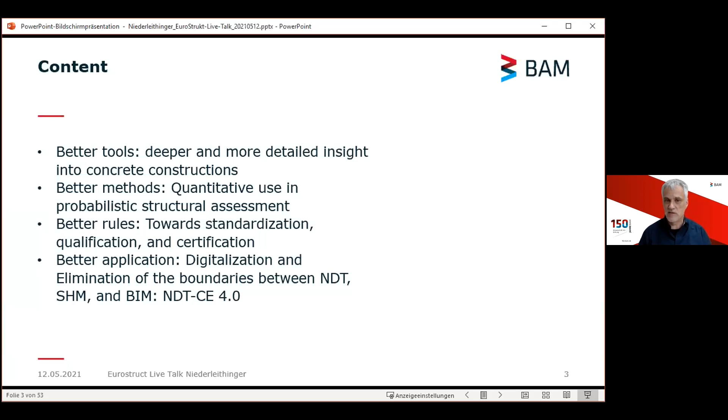I would start with my institution. Probably some of you have come across BAM, the German Federal Institute for Materials Research and Testing. We are part of the German government, part of the Ministry for Economy and Energy. Our predecessors were founded in 1871, so this year we are celebrating our 150th birthday, indicated here on the bottom of my background. We are about 1,800 employees with a mission on safety in technology and chemistry.

There's a large variety of topics, too many to talk about here right now. But more important for today, there are departments of non-destructive testing and civil engineering, and my division is somehow in between both.

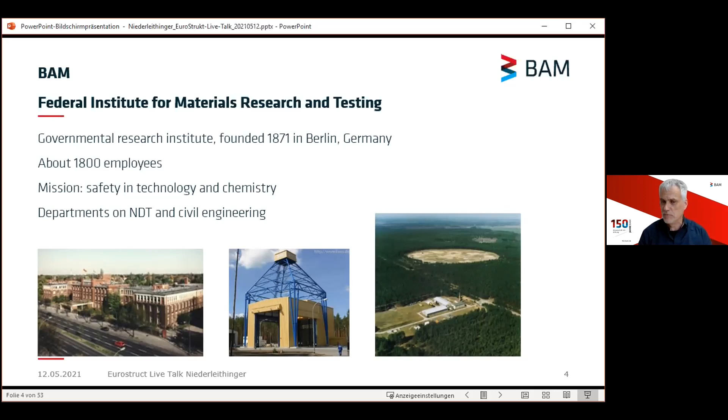What we are actually doing in this division - of course our major work is in research. We are developing or optimizing non-destructive testing methods for concrete and other building materials. We are working on validation of new methods, on providing references, reference data, reference specimens, and other kinds of things. We are also working on standardization in various committees, national and international.

We are doing actual testing on site if it's a more complex task, or if special equipment is required, and providing data analysis. We are also providing workshops and trainings in various ways.

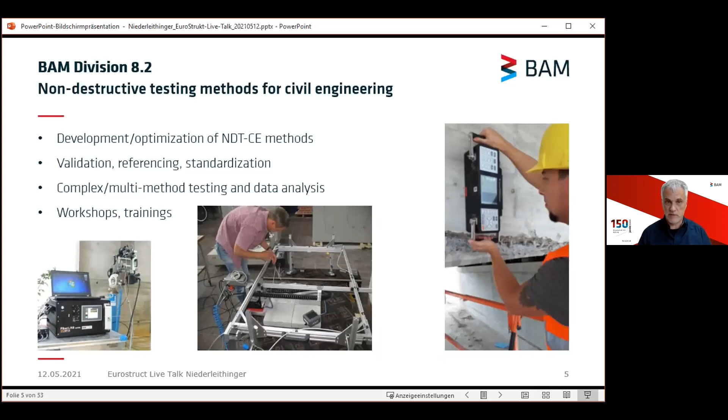Our main methods are ultrasound and radar. I will today mainly focus on ultrasound. There will be some hints to the other methods as well, but ultrasound will be the focus.

We are also working on sensors which can be embedded in concrete - I will show you some examples later. And we are working on something called laser-induced breakdown spectroscopy, a method which can be used to detect elements on the concrete surface with very high resolution and very high speed. Unfortunately, today the time is too short to talk about that one.

We are of course also using some standard methods you probably have heard of or are familiar with, like cover meters, impact echo methods, or the rebound hammer, but we are not doing research on that.

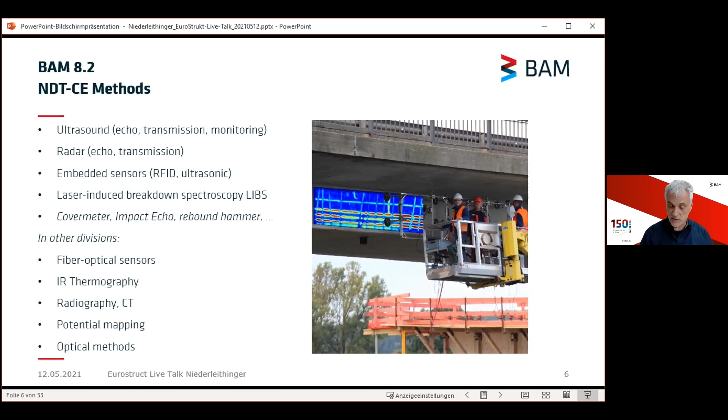That's not all what's done at BAM. There are a couple of other divisions who are also contributing to non-destructive testing or monitoring in civil engineering. For example, there are divisions developing fiber optical sensors, working with infrared thermography, radiography, computed tomography, potential mapping, and optical methods. And of course, if it's needed, we are joining forces.

Our application areas are in general any kind of quality assurance in civil engineering, condition assessment, and structural health monitoring. Our main application area is road infrastructure, but to a certain extent also railway or waterways. We are covering everything between buildings, basements, foundations, roads - name it, we are doing it.

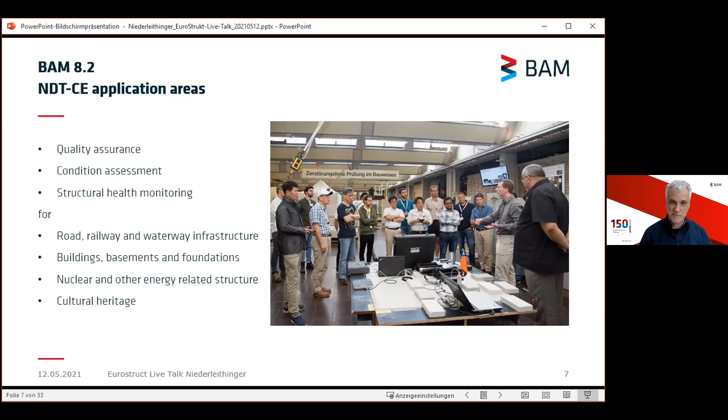We are also working more and more extensively on nuclear structures, mainly nuclear waste storage. Nuclear power plants is not a big topic for Germany anymore. And from time to time, we are also working on cultural heritage.

So what is it all about? Why are we doing NDT in civil engineering? Of course, that's to keep the iconic and also the non-iconic buildings of the civil infrastructure as long as we can. There are a couple of excellent examples of buildings standing upright for 1,800 years, like the Pantheon in Rome. So the ultimate goal would be to keep modern buildings as long as that. Probably we will not be so successful, but 100 years is still a very challenging goal.

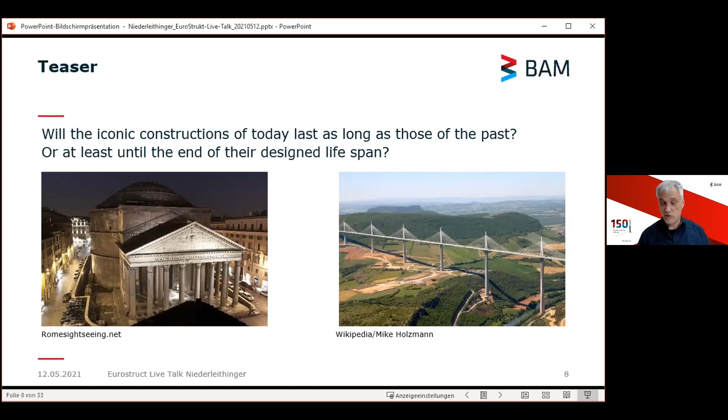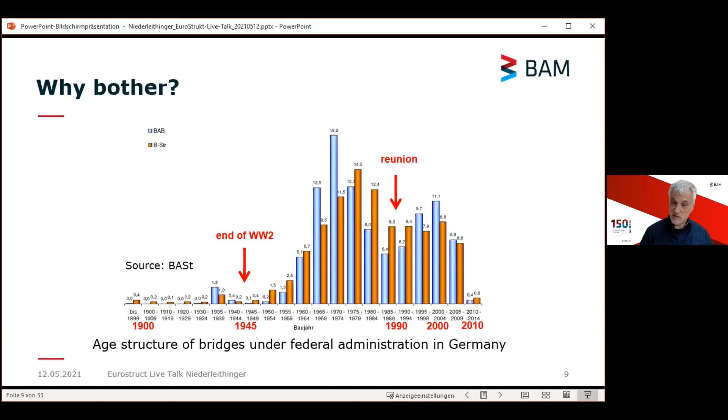So what's special about the infrastructure in Germany? Probably you have seen similar graphs before. There's almost no infrastructure left, mainly concrete bridges, before 1945 for obvious reasons - that was the end of World War II. There was a large amount of rebuilding in the 1960s, 70s and until the 80s, then a small decline, and another smaller peak after German reunification. Some of these buildings, now 30, 25, 20 years old, already show signs of deterioration. But our main target is still the bridges from the 1960s and 1970s, some of which are close to the end of their service life for several reasons.

Fortunately, the state of the art in non-destructive testing has developed a lot. Probably some of you have worked with conventional, simpler methods such as the rebound hammer or ultrasonic pulse velocity - that's been around for 50 or more years, standardized and commonly used. But after the 1990s, there was a very fast and extensive development of other methods, such as ultrasonic echo, radar, and others, which gave deeper insight into concrete structures. In the 1990s it was mainly bulky, complicated devices, slow and hard to deploy, used only by specialized experts. But beginning from around 2005 to 2010, more and more methods came around which are easier to use, commercially available, and give on-site information about what's inside a concrete structure.

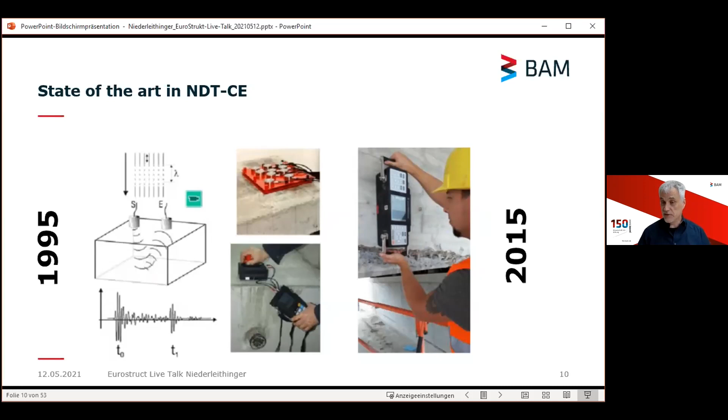One example would be ultrasonic echo testing by point contact transducer arrays, which give a direct image of the interior on a small screen. This is not the end of the story - development goes on and on.

Two examples of very innovative and modern tools would be GPR equipment, such as the one produced by the Swiss company Proceq - very small, very easy to use, directly attached to cloud data storage, giving information on site, even using augmented reality to show the user where it's safe to drill or where to check reinforcement. The ultrasonic development also goes on. On the right side is an example from the Russian-German company ACS, who now provide, starting this year, a true 3D ultrasonic device called Mira 3D, which gives, with one single measurement, a 3D picture of the structures inside the concrete. That's most probably not the end of the story - it's just one point in time, and development will go on.

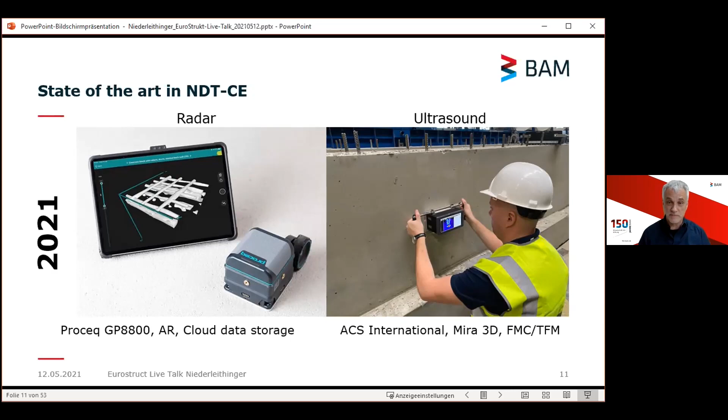The main thing for practical application is that these methods are meanwhile more or less successfully implemented in practice. Ultrasonic transmission, for example, is used to check the quality of concrete, either in the lab or on site. Ultrasonic echo is used to detect tendon ducts, as in the example on the right. Then, directly on site, we can give information to the responsible engineers about what was going on.

Still, there are a couple of things we have to work on. For example, the depth of penetration for most methods is limited - one meter is a good guess for this limit. If we have very complex structures, the imaging methods might not be sufficient at the moment, and mapping complex or diffuse deterioration is a big challenge. Also, detecting slow and small damages is a challenge.

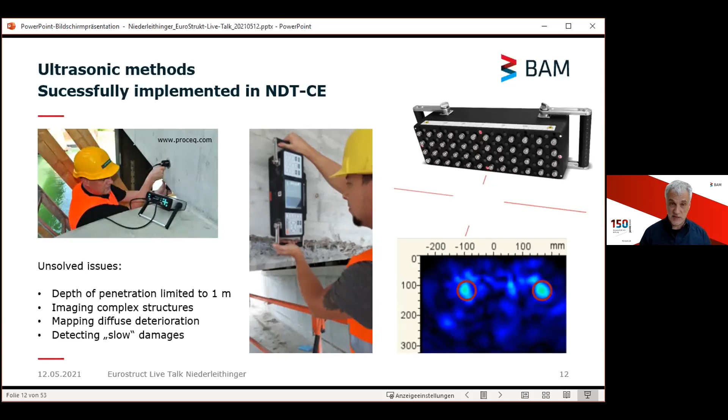I will provide some ideas for solutions to these techniques. But before that, I will show you an example of how results acquired with commercially available instrumentation today can be used in a better way than just to provide colorful images to detect rebar and avoid hitting the rebar when drilling, or to avoid hitting a tendon duct when drilling, and these kinds of things.

One challenge in Germany currently is that we have to reassess about 2,000 bridges under federal administration, because they are in intermediate to bad condition or have structural deficiencies or other issues. What's normally still done today with these kinds of NDT is to show pictures like this - maps of the interior of the concrete with signatures of, for example, tendon ducts or the thickness of the structure.

What we propose to do is to evaluate this data in a more thorough way, to check all the influences which give indications of the potential errors and standard deviations and other issues, to provide a really statistically proven quantitative measure, for example for the depth of a tendon duct, which can then be used in quantitative probabilistic assessment of a structure.

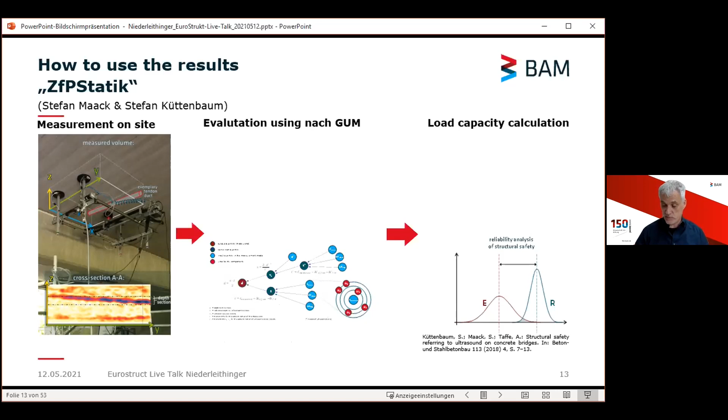One example is a pre-stressed concrete bridge in Bavaria, near Munich, where a very detailed assessment was done because it was known that the load capacity, according to the older standards, was not sufficient to cope with the traffic anymore. It's a box girder bridge over a medium-sized river, with 3 spans between 40 and 55 meters.

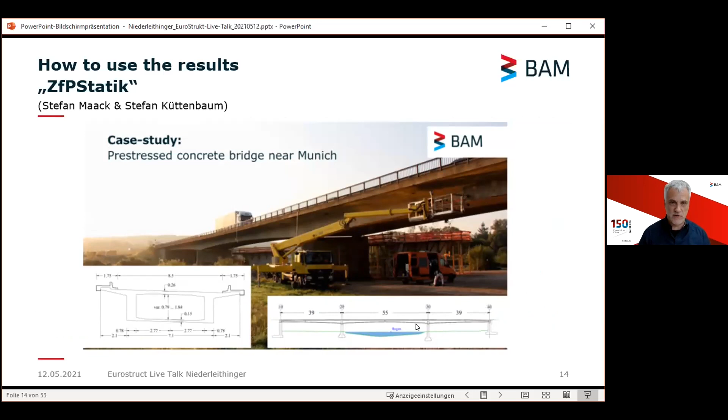What was done first is to check what kind of parameters are really important for the probabilistic assessment, and where we can gain the most information and value out of any kind of measured values.

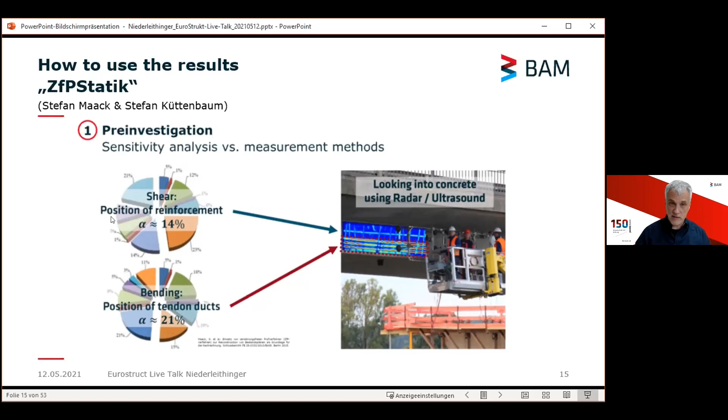After a very detailed analysis of the bridge, it turned out that the position of the shear reinforcement was very important, and also the position of the tendon ducts. If we could provide very precise values on these positions, we could potentially improve the trust in the load capacity assessment and even get higher reliability values. So what was done there is to use radar and ultrasound to locate shear reinforcement and tendon ducts, and to do a quantitative analysis on that.

So that's an example, that's the cross section. We were looking for the outer tendon ducts. We were able to see the first row and also the second row, not the inner ones, but the outer ones were the most important. We used ultrasound and then radar to detect the precise position and depth.

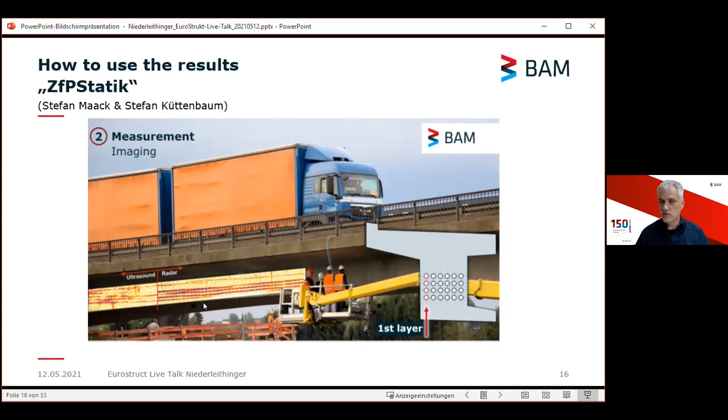We didn't just provide the colorful pictures, we also picked the positions of these tendon ducts, calculated all potential influences, potential errors, standard deviations, and so on, and put this information into structural models with all the uncertainty information.

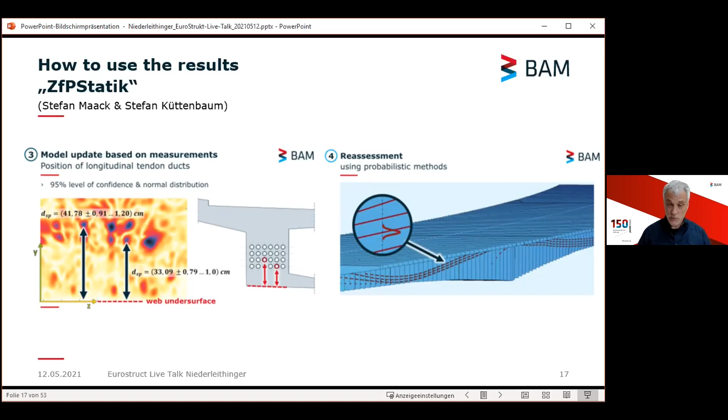The good thing is that after this detailed evaluation, we helped to raise the reliability index from a certain value here, 3.8, to values around 4.8. So by more than 20%, about 25% higher reliability of the structural reassessment.

That's just the beginning of the story, there's still work to be done. There are 2 recent publications, unfortunately only in German so far, but that's one path we will continue on, to provide a way to use non-destructive testing methods really in a quantitative way.

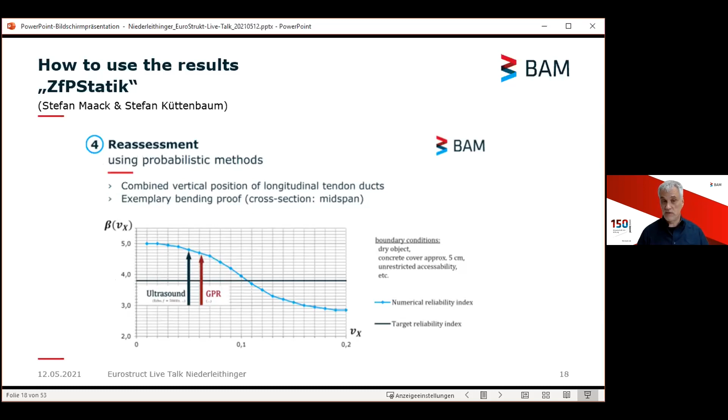But there are other issues with NDT in civil engineering. I mentioned that we have a depth limit of about 1 meter, but there are lots of constructions which are thicker than 1 meter: certain bridges, dams, also certain buildings in nuclear facilities, and probably you have other examples.

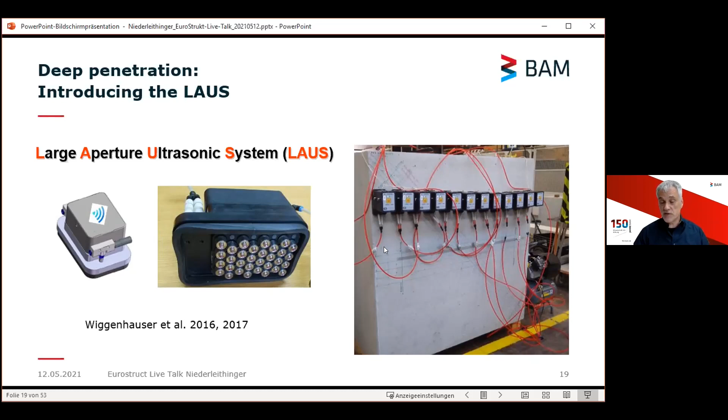What we have done is to build a really large ultrasonic instrument, called the LAUS, Large Aperture Ultrasonic System. With many probes, which can be freely positioned on a surface, using vacuum to stick onto the concrete surface - all these red things you are seeing here are vacuum hoses. This instrument is able to look much deeper than commercial ones.

One application example is a bridge close to my hometown Berlin, about 2 meters thick. During the concreting, there was a heavy rainstorm. At some point in time, the formwork was half full of concrete and half full of water, so of course this had an effect on the concrete quality. Some of the damages were visible from the outside, but the authorities wanted to be sure that there were no serious damages on the inside.

From the bottom of the bridge, it was easy to check the damages, but as this bridge was about 2 meters thick, the commercial instrumentation failed to map the entire structure. So we used this LAUS system from the top to check the position of the tendon ducts and to see whether we see any indications of disturbances above them.

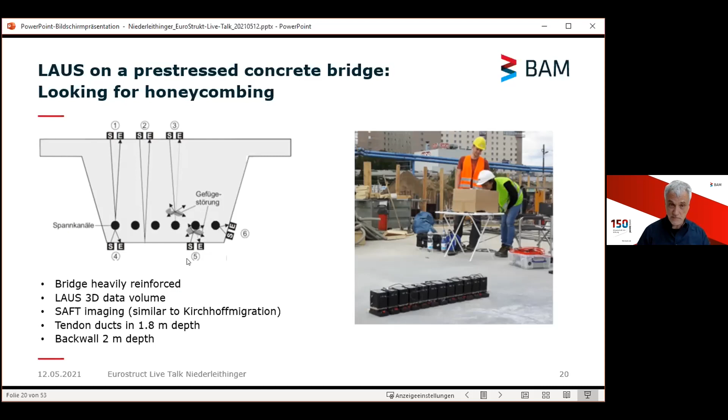That's one example of a vertical cut through our 3D data volumes. You see here there are reflections, clear indications of the top of the tendon ducts, a little bit weaker on the outside because there we have less coverage by ultrasonic energy. We also see the backside, the lower side of the bridge, with some gaps because the tendon ducts produce a shadow. But this looked quite good, and so we could deduce that most probably there's no big issues above these tendon ducts, because otherwise we wouldn't have seen these clear echoes.

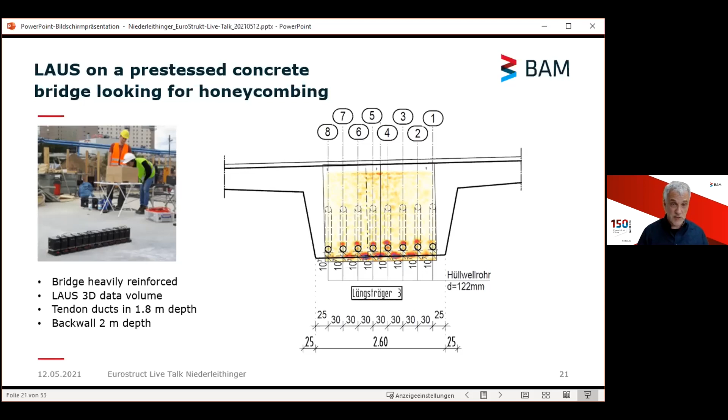Unfortunately, in some places the data looked different. If we look now at horizontal slices at the level of the tendon ducts, at some places the tendon ducts were quite clear to see, very clear echoes, very sharp at the position which was expected. But there were other places where these echoes were very blurred or even missing.

So we did the most simple thing to do: we asked the contractor to drill and check whether there were some issues. And actually there were issues - there were honeycombing and other forms of bad concrete. But fortunately, this could be repaired by injection, so they didn't have to replace the bridge.

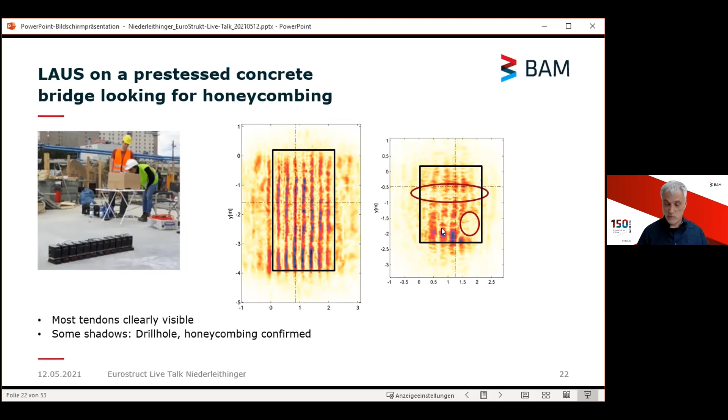As you've seen, the images were not perfect. We just see reflections with gaps and indications of the top of the tendon ducts. We won't be able to see the precise structures or even the diameter of the tendon ducts. That's one thing we're still working on, using input from geophysics.

For example, using an imaging method called reverse time migration. I won't go into the details here. We had PhD students working on that, or still working on it.

For simple examples on materials like polyamide, which is easier than concrete because it's homogeneous, with holes inside, we could provide images which can be used to measure the diameter of these holes quantitatively. So if you have an unknown type of tendon duct in your bridge, this method could potentially be used to check for the type of tendon duct, its shape and diameter.

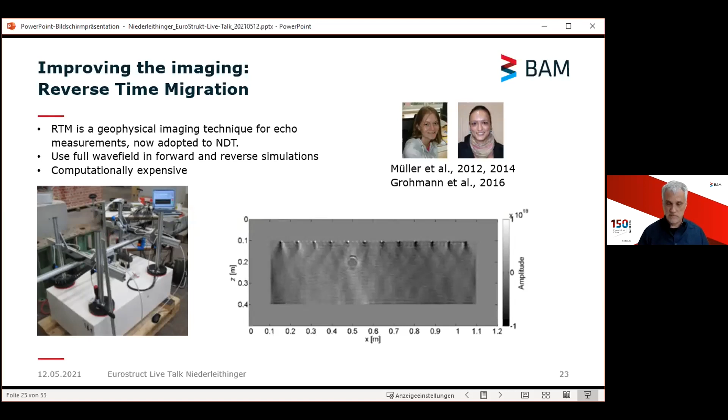Unfortunately, it's still a method under research. It's also computationally very expensive, but for some tasks it might be used.

One example where we combined both deep penetration and better imaging is a nuclear facility in northern Germany. It's a nuclear waste storage site which has to be closed down. It's a former salt mine, and to close the former mining tunnels, a special type of concrete is used, in the form of big plugs, 4 meters by 4 meters by 25 meters long.

Of course, no ultrasonic instrument is able to map 25 meters of concrete. We did some trials with our LAUS system and were able to locate at least some reflections from up to 7 meters, where there was no built-in structure.

So we thought it might be a crack, and it was later proven by drill holes that there were cracks. Of course, that's a bad thing for an engineered barrier in a nuclear repository. Fortunately, this is just a trial site, so no harm done.

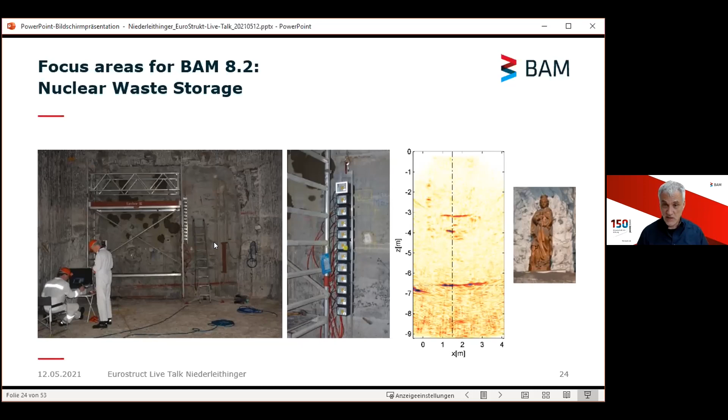Our data can now be used to improve the concrete mixture and the way of building it to provide better sealing. As we were not fully satisfied with the image quality—this is a cross-section, I'll skip this—we tried to use better imaging methods.

So this is the reverse time migration I've shown before. First, we did some simulations to check whether we could image the shape of any kind of crack correctly and also detect features at deeper depths.

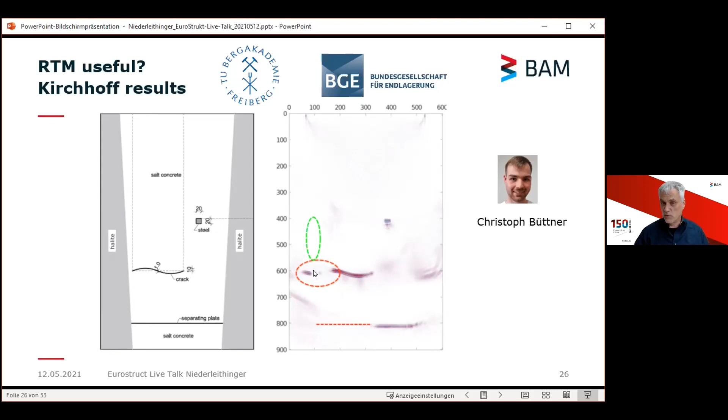We saw that conventional imaging shows some things, but they are not complete. We also don't see the side boundaries and other kinds of things. Using these new methods, we get a better image of this sinusoidal crack type, more information of this plate, and we're starting to see the lateral boundaries.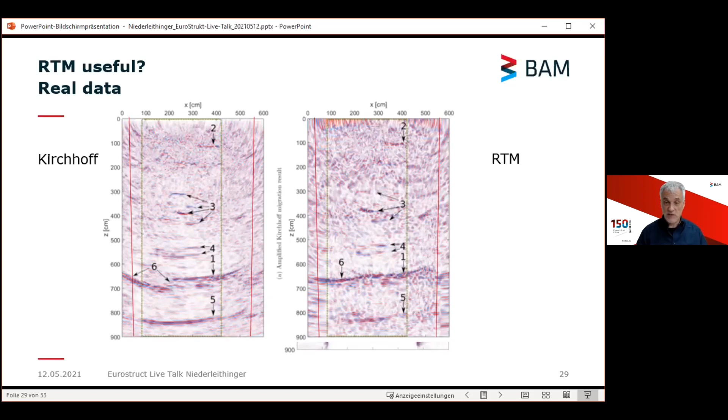We were also able to get a better image of the plate down here below, without artifacts at places where there's actually no plate. That's work and research which has to be continued in the coming years.

One other development in non-destructive testing is that we're starting to loosen the boundaries between non-destructive testing and structural health monitoring. We're using similar sensors and similar methods, and putting the information together to get better models and better information for structural engineers.

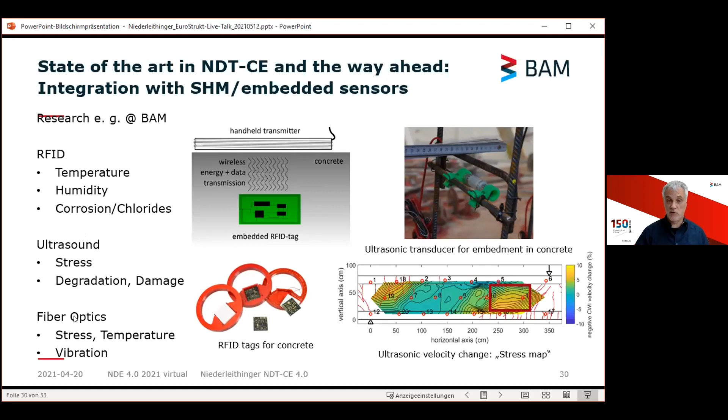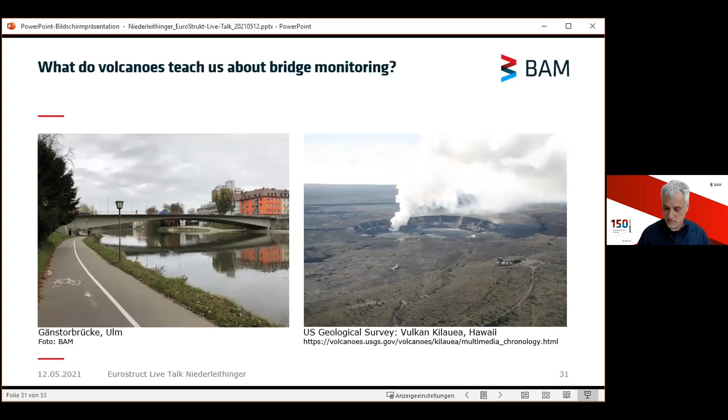So one example for this kind of work: you could imagine that a volcano and a bridge are totally different, but they have some things in common, because they both have slowly developing damage. At a certain point the damage development might speed up and there might be a sudden collapse or eruption. We need to measure these tiny precursors of deterioration before anything serious happens.

For volcanoes, this is done by seismologists measuring the speed of seismic waves. They're able to detect very small changes in velocity, less than 1% change. A couple of weeks before the actual eruption, we see a drop in velocity, and this drop occurs much earlier than any other kind of indication.

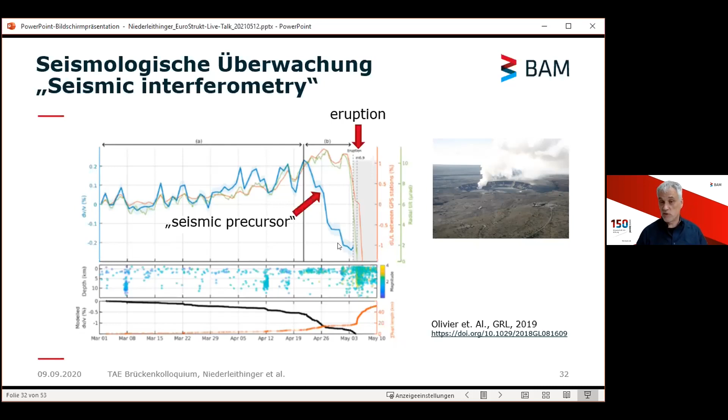These other curves are for conventional measuring tools like inclination of the surface or changing distance between two landmarks and so on. So measuring the speed of seismic or ultrasonic waves might be a useful thing also for civil engineering.

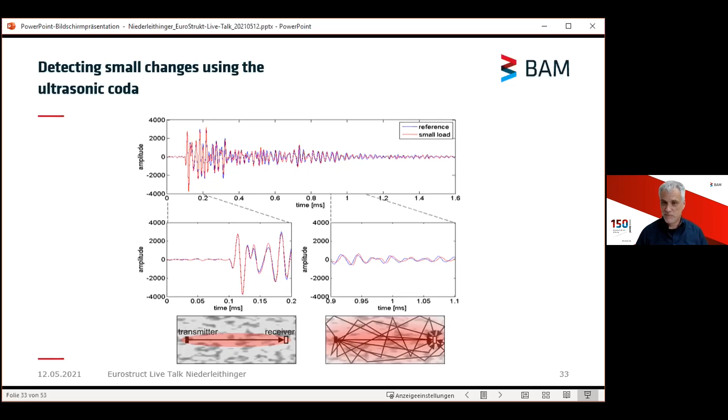There's another good point for looking at this late part of the signals: we can cover a very large area, so we don't need that many sensors to cover a certain part of a construction. Of course resolution is limited, but still we might be able to capture the part of the bridge where change or damage is happening.

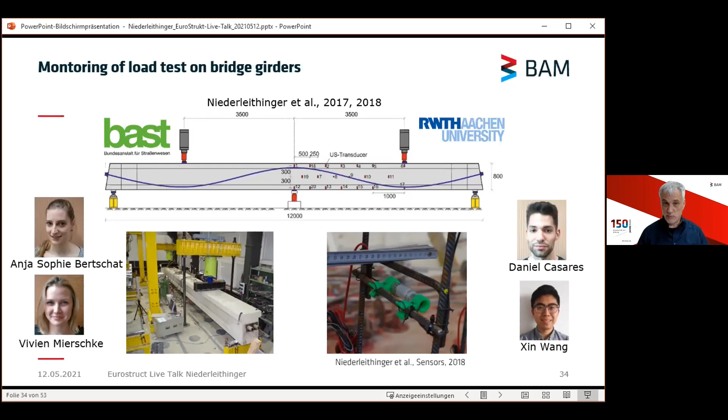Some experiments were done at RWTH together with the German Road Research Institute, with a network of these ultrasonic sensors in a two-span bridge girder in a full-scale load experiment. We were allowed to put sensors in a part of this girder, and at a certain load point we were able to provide a map of velocity change.

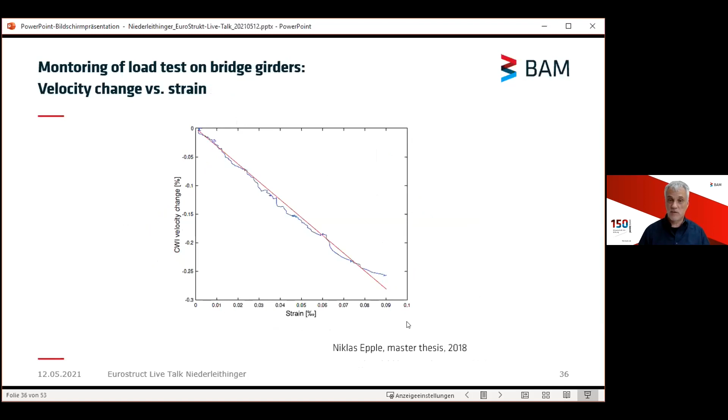We can even, by calibrating with some local strain gauges and comparing velocity change to strain, calibrate these images and provide maps for strain change. That might also be a very useful tool in the future.

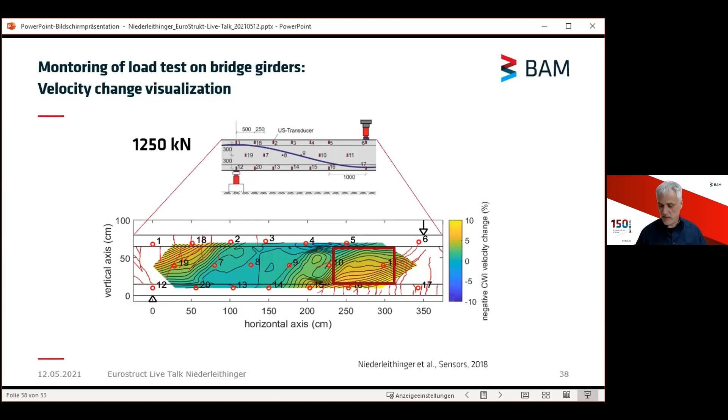We also see some anomalies in our ultrasonic strain maps where we didn't expect any cracks, but actually there were some, because concrete is not completely homogeneous. We have some inhomogeneities here which are also reflected in these maps.

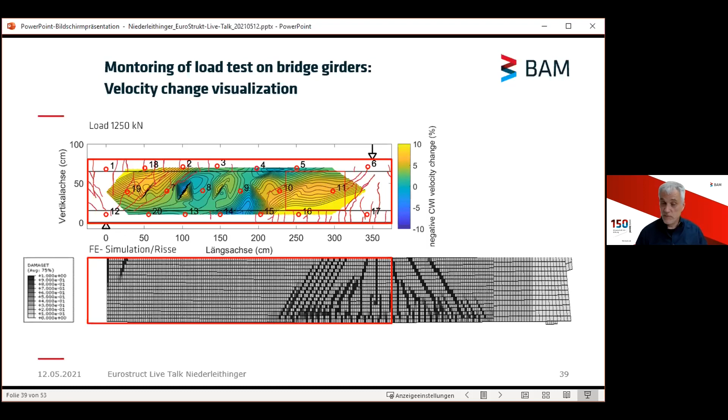Because we're able to map these inhomogeneities, we might even add more information to simulations which predict the crack pattern. The pattern is similar, but not the same, so we might be even a bit closer to reality than the simulation.

This is now being tested in practice at the bridge over the River Danube in Ulm in southern Germany, where this bridge from the 1950s is equipped with several monitoring systems so we have something to compare with - for example acoustic emissions, strain gauges, and other devices. We have put our sensors in there.

We are measuring the velocity changes over time - these are data from one week, and of course we mainly see the temperature change - but this is now continued, and probably end of the year we will have a good example of how this method can be used in practice. We will do some load tests there to prove that our method really is able to detect any kind of additional damage.

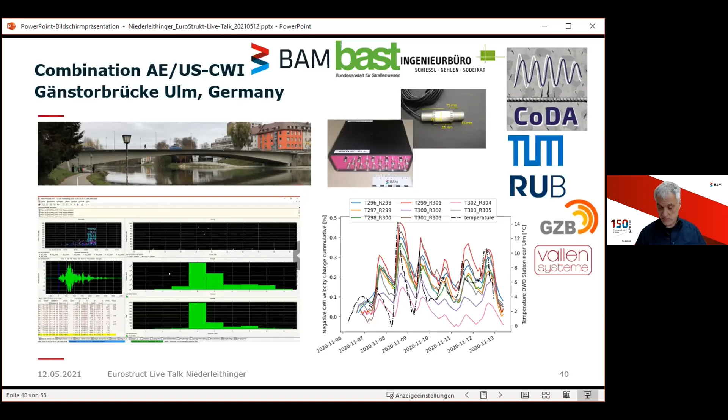Finally, we have to put all this data somewhere. So far, the NDT world has always been a little separate from other parts of civil engineering. There were specialists giving reports on paper or as a PDF to engineers, but there was not really quantitative data exchange. The main way of exchanging data in the future in civil engineering is, of course, building information modeling. There are limitations to that, but most probably this will play a central role in any civil engineering project. NDT and structural health monitoring can provide information to several phases in the BIM information modeling cycle.

It can help document as-built buildings. We can do quality assurance during fabrication and construction. We can assist in operation and maintenance, for example to check a couple of parameters, as well as in destruction and renovation.

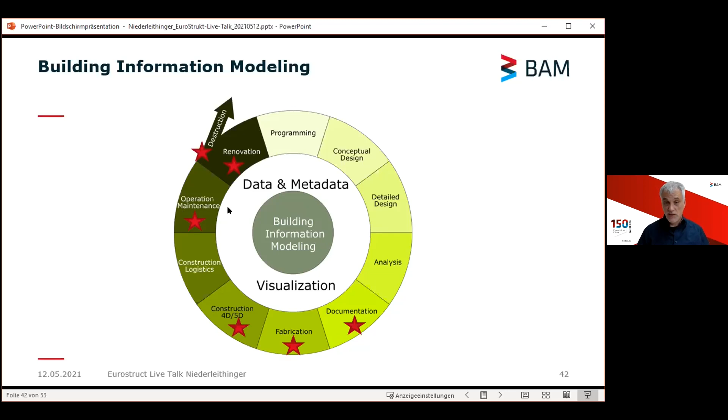Unfortunately, there is so far no interface between BIM software and NDT and sensor data. There are a couple of national and international projects starting to work on this, to use BIM and NDT and sensor data to get better models or even provide digital twins. But that's not standardized yet, and that's one thing we have to do.

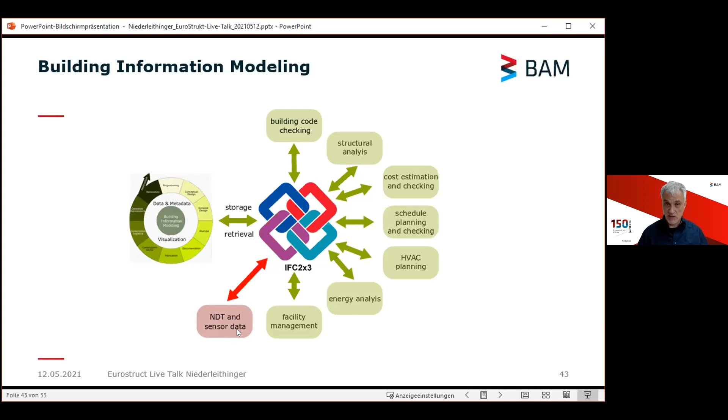The probable focal point here will be something called Industry Foundation Classes, which provide formats to exchange information between BIM and many other things, such as structural analysis, energy analysis, facility management, and potentially also in the future NDT and sensor data. But there is still a lot of work to be done. That's a challenge for the future.

We probably can learn a lot from Industry 4.0 and the Industrial Internet of Things. In today's smart production, these kinds of things are already used. Monitoring and NDE sensors and devices all have internet-capable interfaces, and they can directly talk to each other. They can provide data for scheduling maintenance, but they can also be directly connected, for example, to the economic part of the software in production.

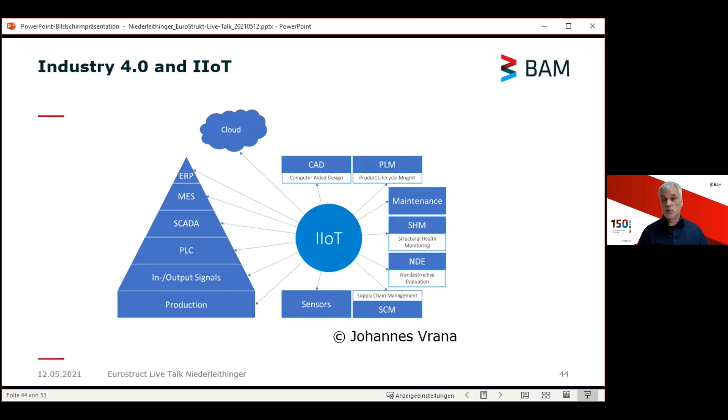In civil engineering, we will probably still have some different systems, because I don't expect that raw data from structural health monitoring or NDT will directly go into any BIM software. Probably just the information about the results, or the places where measurements have been done, will be given to the BIM software and also visualized there. But the raw data, including all the metadata, will probably be in a separate place, because it's simply too much data for the BIM software. But we have to provide the interfaces here, and that's things which are still under development.

Even providing this system, which defines formats between the sensors and devices and the databases and the persons doing the interpretation, has to be developed yet.

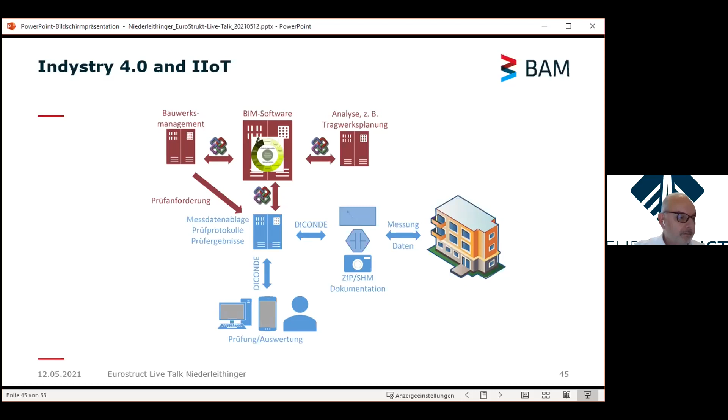One project which has just started is working in that direction. It's called CASPAR. It's joint work of BAM and the University of the German Army in Munich, and several industry partners, to provide something like a database system which is able to collect all kinds of data, put them in a really trusted data storage using blockchain technology, and provide interfaces to BIM, to CAD software, but also to any kind of analytical software.

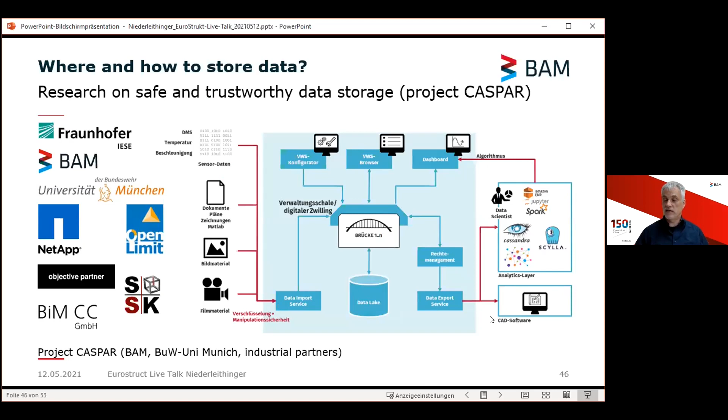Finally, I was talking about needing standards for this kind of data exchange, but that's not the only part of NDT and civil engineering where we need more standards. In other fields of NDT, we already have dozens of standards on certain methods, sensors, evaluation technologies, and formats—they almost have everything done at the moment. But in non-destructive testing in civil engineering, for example in Germany, we just have the rebound hammer and ultrasonic pulse velocity standardized.

There are a couple of initiatives which are probably going to change this. I'll name one: the EC project IM-SAFE—Professor Heidi and Professor Strauss are both part of that—preparing a way towards European standardization and monitoring. That's a very important initiative, and it's very urgently needed. But also for the qualification of personnel and institutions, we need more work to be done. In traditional NDT, there's already a very sophisticated three-level qualification scheme.

Certification is regulated and everything works in an organized way. So if someone has done one of these trainings, he can really be trusted to do a good job on site. But in non-destructive testing and civil engineering, we have only very simple qualifications.

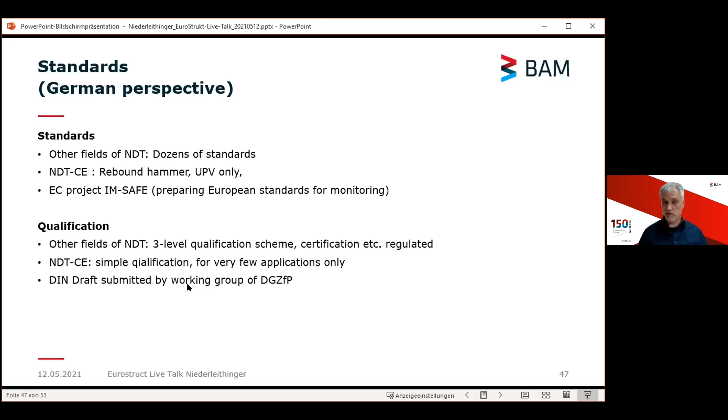So instead of giving a conclusion of my talk, I promised one more thing. This is something that was new to me a year ago, and I want to share what we have done so far in that direction.

Cosmic rays, one special type of cosmic ray - I'm talking about cosmic muons. These particles are not cosmic rays themselves but are generated by cosmic rays - fancy particles generated in the upper atmosphere, going downwards and penetrating deep into the Earth. That's natural radiation. There's almost no harm done by them, and especially no additional harm done by them.

There have been a lot of experiments using them, for example to locate voids in the pyramids. My colleague, Professor Christian Grosse from Technical University of Munich, is currently using GPR to check whether these results are actually true. But there are also starting to be commercial applications, for example checking containers for contraband, or checking radioactive waste containers for anything in there that shouldn't be.

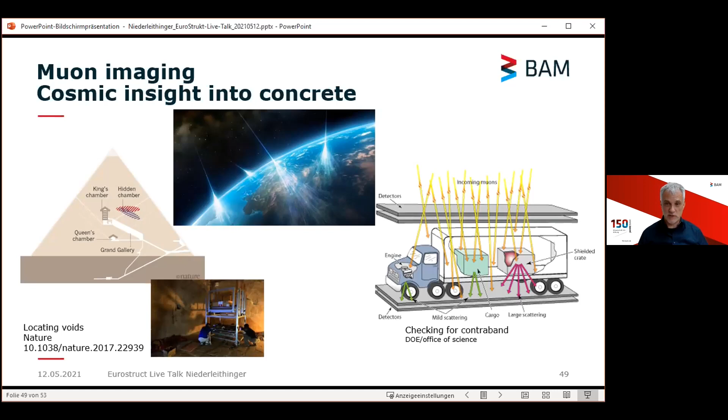There's a company in the UK who is starting to work on commercial instrumentation, and we did a joint experiment with them. This company is called Lynkeos, situated in Glasgow, Scotland.

This is the detecting system. There's not much to see from the outside. There are detectors on top to check the incoming muons, and detectors down here checking the outcoming muons. Some of these muons are scattered when going through whatever is in between these detectors.

For example, one of our BAM reference specimens made to check NDT methods. Inside this concrete specimen, we have a tendon duct, some reinforcement, and also a styrofoam plate. What we wanted to see is whether this method might be capable of doing, in the end, an X-ray of a bridge without having to use X-rays and radiation protection. That's what we wanted to check.

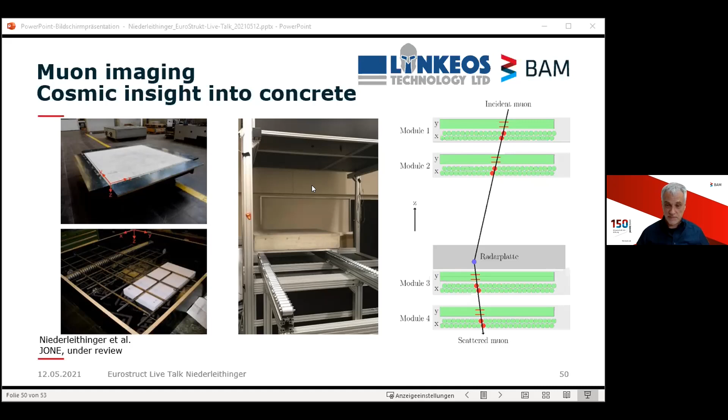So we brought one of these specimens, 700 kilos, to Scotland and put it in that detector. We also did other measurements like GPR, ultrasound, and actual X-ray. We have a big X-ray machine at BAM, so we had something to compare with.

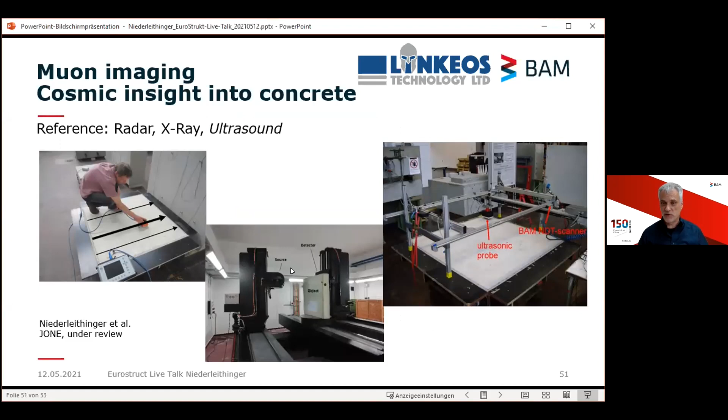We see this also with the other method, but still for a first ever experiment, these are pretty good results, and that's one way we want to work on further. The main challenge is to provide detectors which are mobile and can be brought to a bridge.

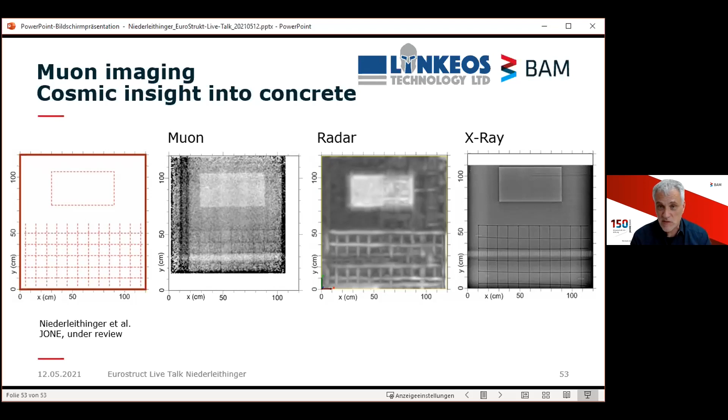At the moment, often the problem is not competition between academia and firms. In many cases it might just be finding someone who is able to do the job. For example, we get a lot of calls from authorities asking, can you do this and that? And I try, but we can't do it - can we find someone else who can? It's sometimes more work available than people able to really do a good job. So I don't see a very big issue here.

Thank you very much. So, thank you.